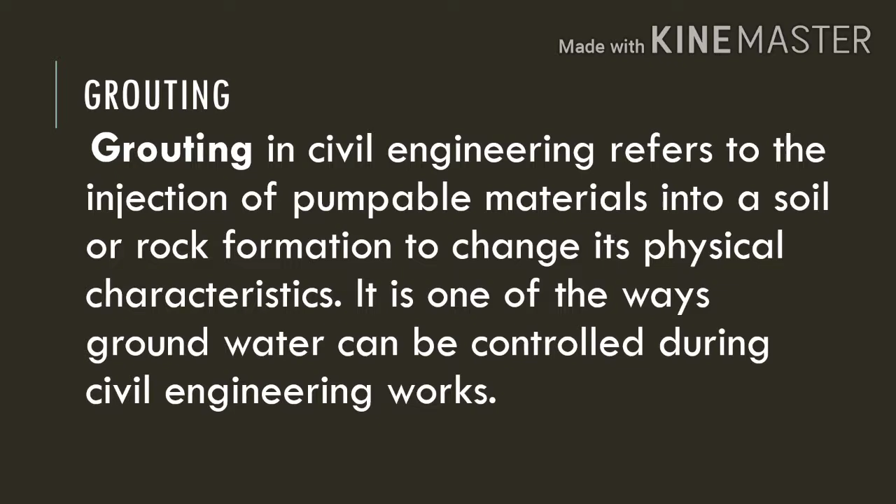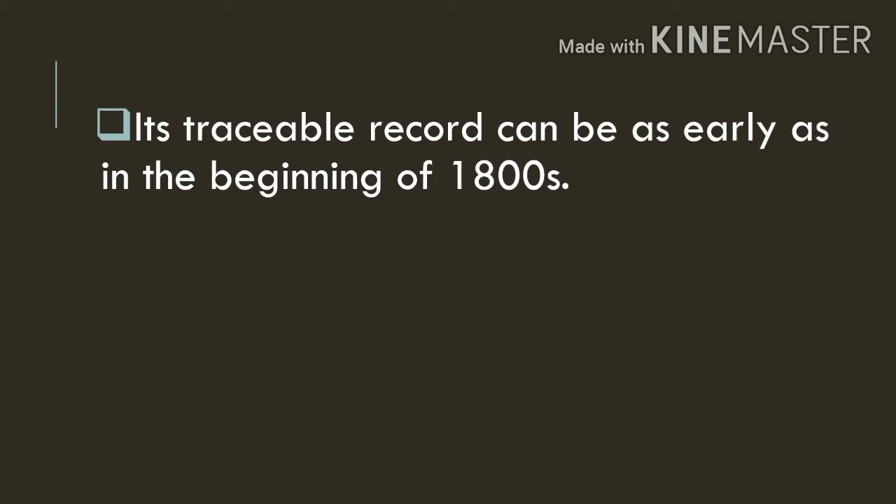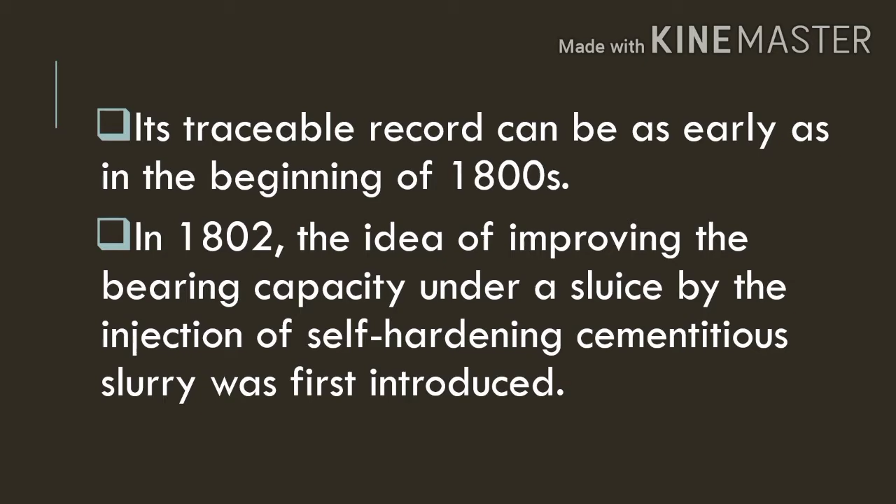History and development of grouting in civil engineering. Its traceable record can be as early as the beginning of the 1800s. In 1802, the idea of improving the bearing capacity under a sluice by injecting self-hardening cementitious slurry was first introduced. In 1864, Peter Barlow patented a cylindrical one-piece tunnel shield which could fill the annular void left by the tail of the shield with grout. This is the first recorded use of cementitious grout in underground construction.

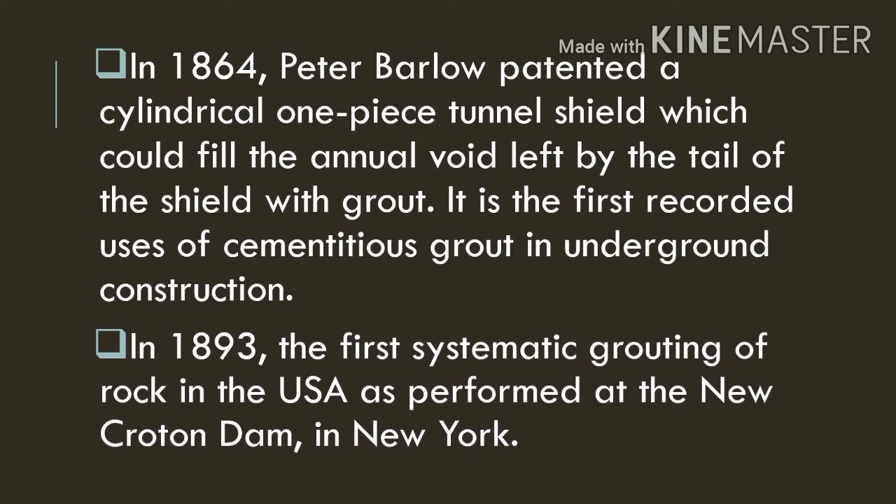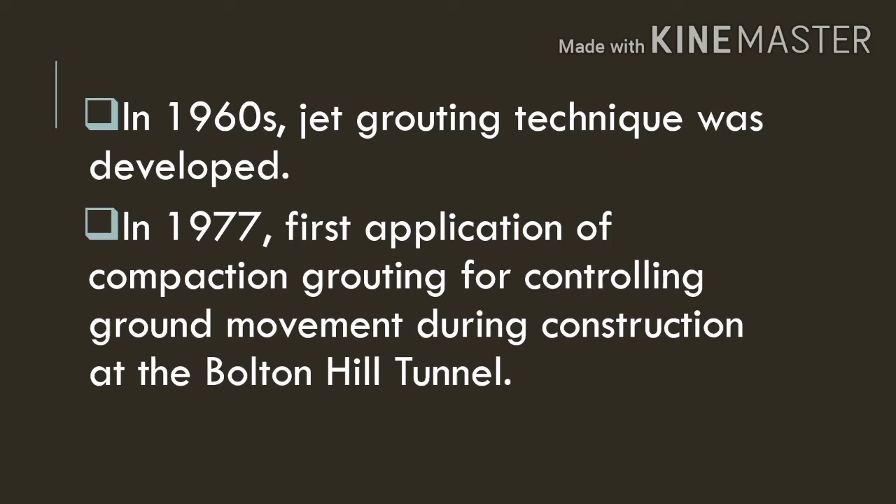In 1893, the first systematic grouting of rock in the USA was performed at the New Croton Dam in New York. Later, in the 1960s, jet grouting technique was developed. In 1977, at the Bolton Hill Tunnel, the first application of compaction grouting for controlling ground movement during construction was held. And in 1995, the first industrial application of the compensation grouting concept was conducted at the construction site of the Jubilee Line Extension project in London.

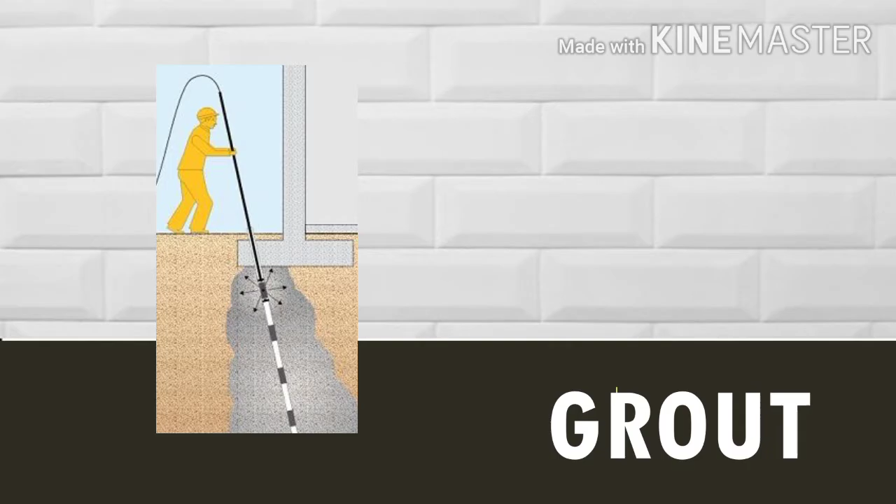Now let's move on to the definition of a grout. Grout is a composite material used in construction to fill voids and seal openings in surfaces. It can also be defined as a solution, an emulsion, or a suspension in water which will harden after a certain time interval. It can be divided into two main groups, namely suspension grout and liquid grout or solution grout.

Suspension grout is a mixture of one or several inert materials like cement and clays suspended in a fluid, water. According to its dry matter content, it is either of the stable or unstable type. It is a mixture of pure cement with water.

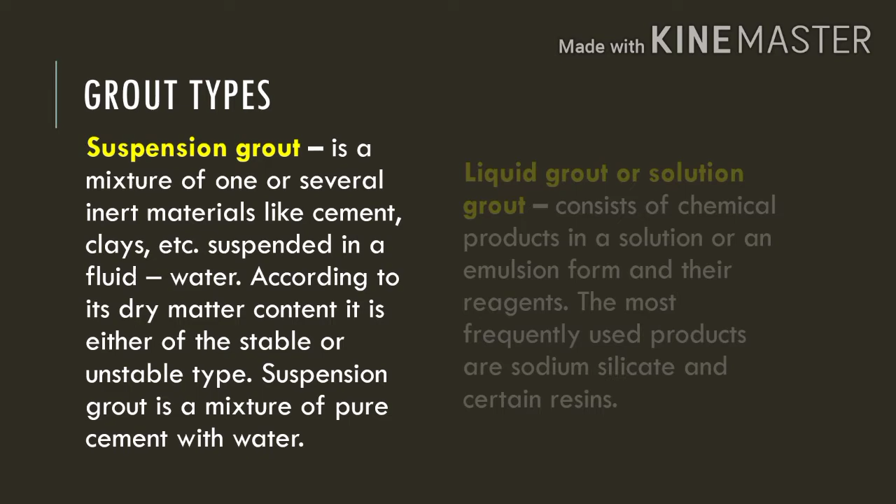On the other hand, liquid grout or solution grout consists of chemical products in a solution or emulsion form and their reagents. The most frequently used products in this liquid grout are sodium silicate and certain resins.

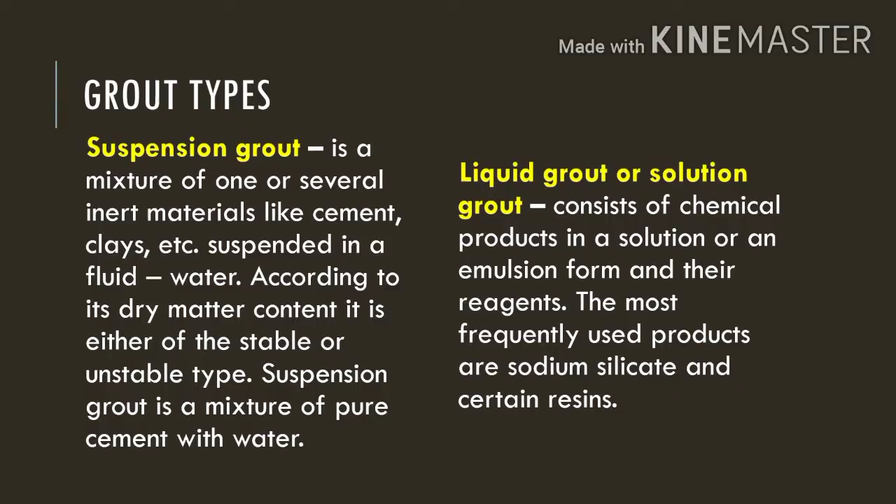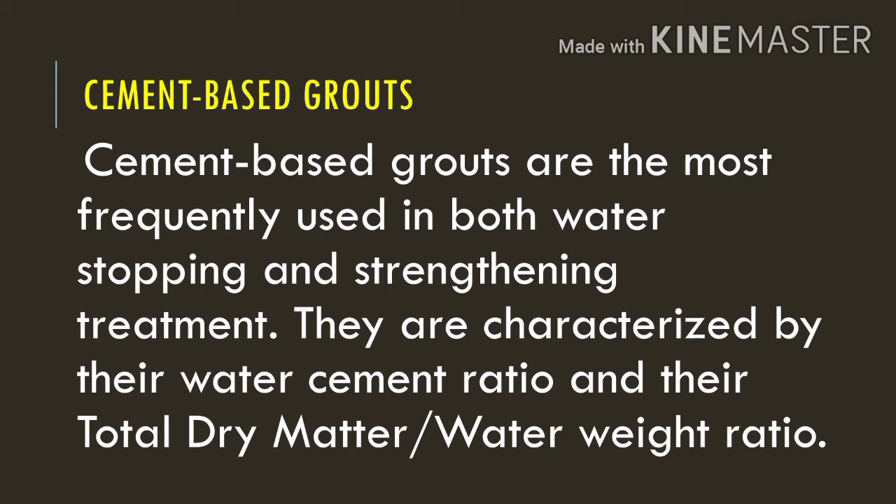There are several known materials which can be used in grouting. First, we have cement-based grouts. Cement-based grouts are the most frequently used in both water stopping and strengthening treatment. They are characterized by their water-cement ratio and their total dry matter/water weight ratio. The properties and characteristics of these grouts vary according to the mix proportions used.

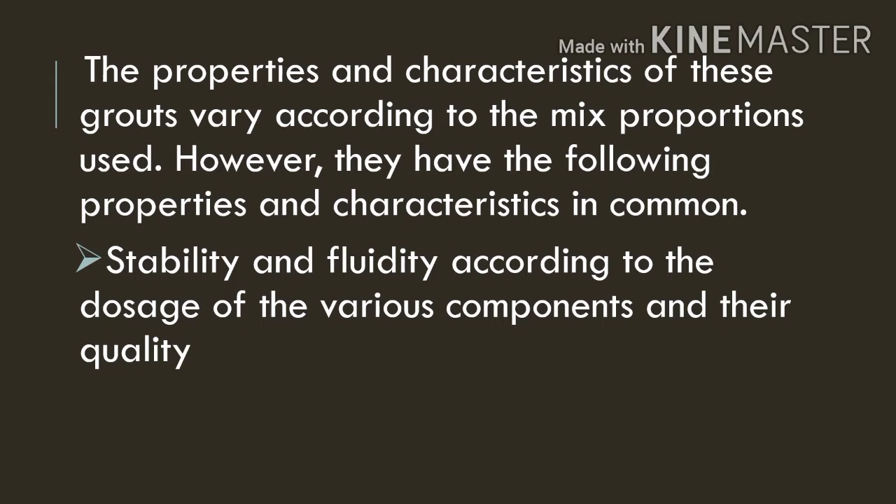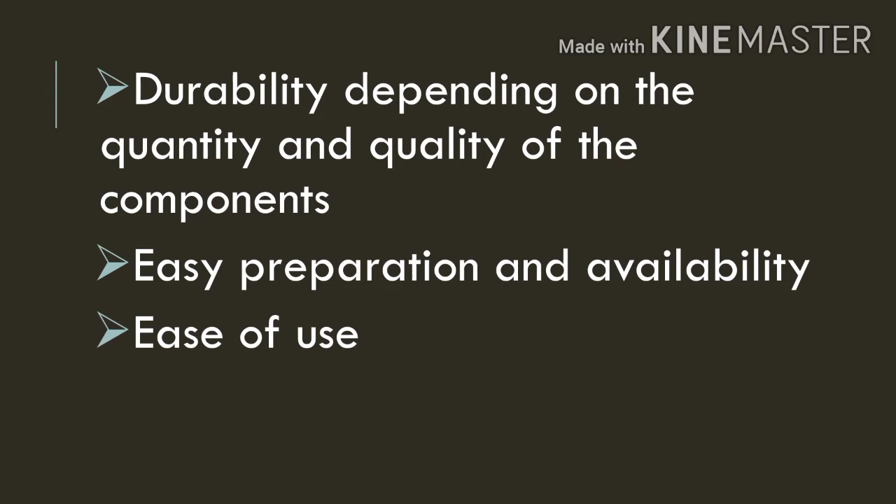However, they have the following properties and characteristics in common: stability and fluidity according to the dosage of the various components and their quality; unconfined compressive strength linked to water-cement ratio; durability depending on the quantity and quality of the components; easy preparation and availability; ease of use; and relatively low-cost mixes.

Another type of grouting material is the pure cement grout. Pure cement grout is an unstable grout. However, bleeding can be avoided with a water-cement ratio less than 0.6 to 0.7. Usual mix proportions are from water-cement ratio 0.4 to 1 for grouting. Very high mechanical strength can be attained with this type of grout.

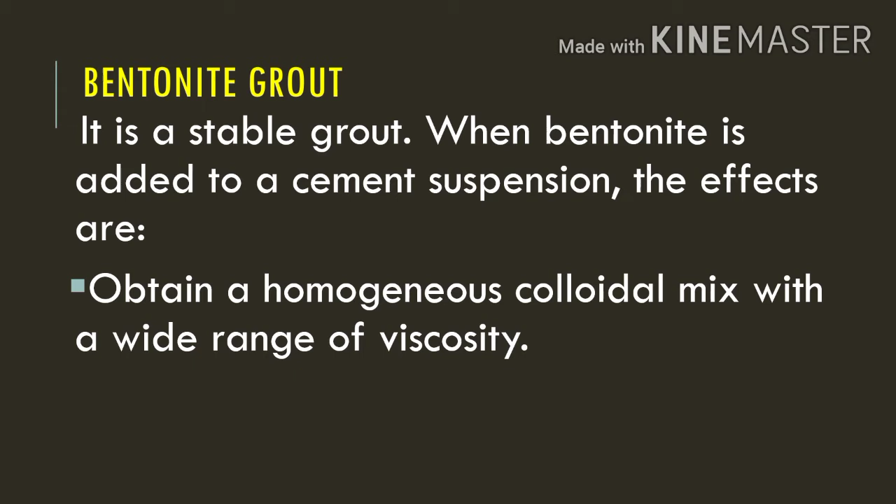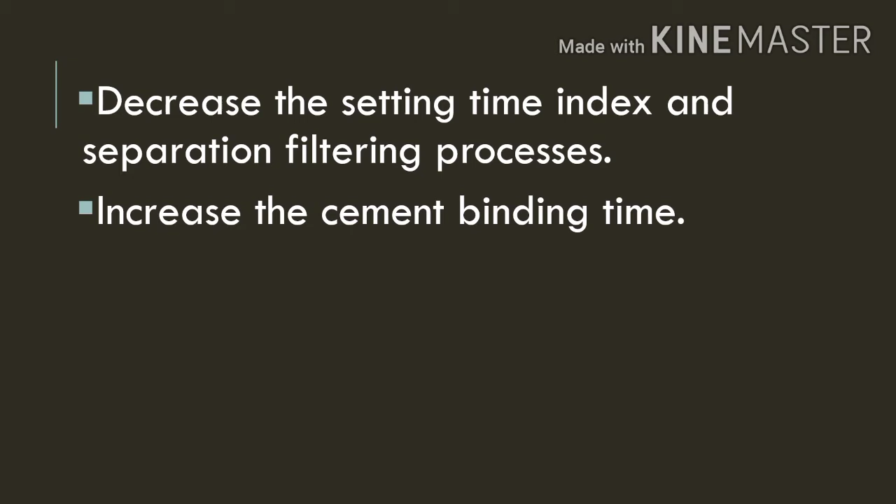Bentonite grout, on the other hand, is a stable grout. When bentonite is added to a cement suspension, the effects are: it may obtain a homogeneous colloidal mix with a wide range of viscosity, avoid cement sedimentation during grouting, decrease the setting time index and separation filtering processes, increase the cement binding time, improve the penetration in compact type soils, and obtain a wide range of mechanical strength values.

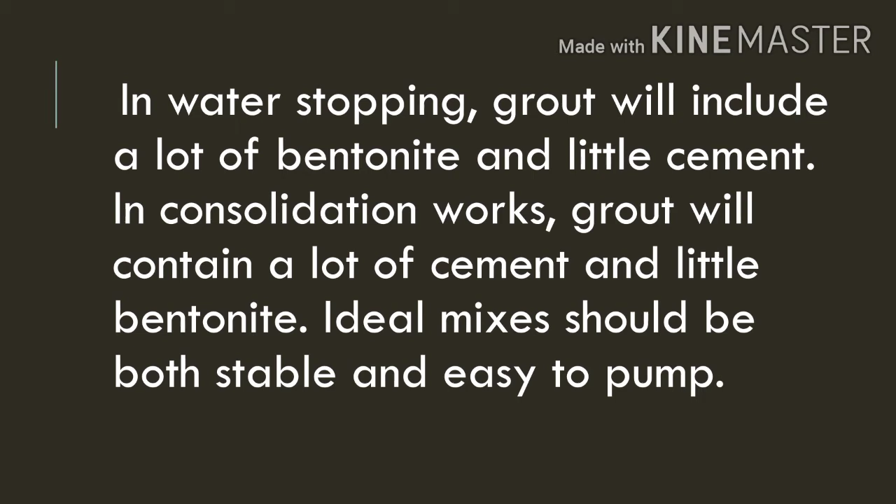In water stopping, grout will include a lot of bentonite and little cement. In consolidation works, grout will contain a lot of cement and little bentonite. Ideal mixes should be both stable and easy to pump.

Another type of material is grouts with fillers. Fillers are added in order to modify the viscosity of a given grout so as to obtain a low-cost product to substitute the cement. The most commonly used fillers are natural sands and fly ash from thermal power stations.

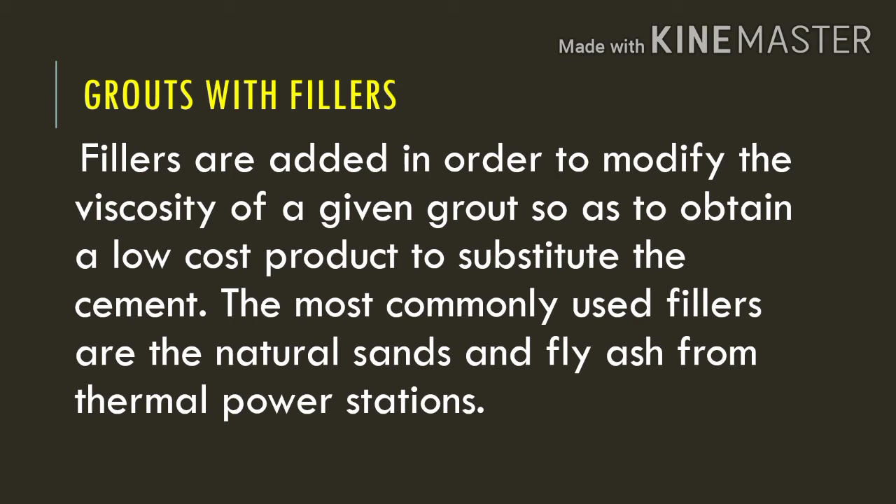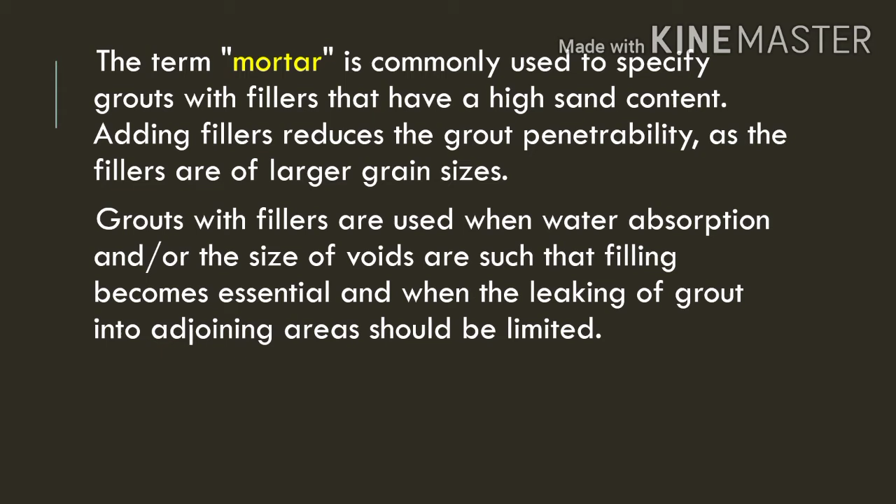Grouts with fillers are used when water absorption and/or the size of voids are such that filling becomes essential, and when leaking of grout into adjoining areas should be limited. In addition, fillers in grout will produce low slump grout with high viscosity for certain grouting purposes.

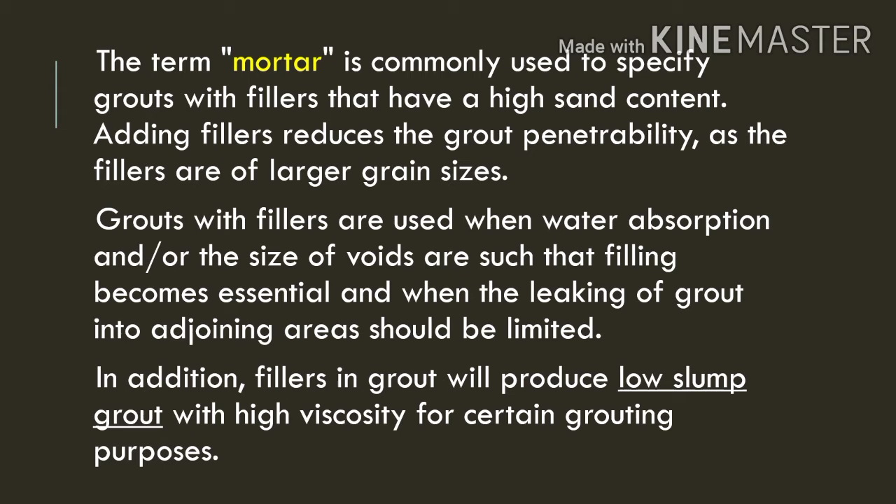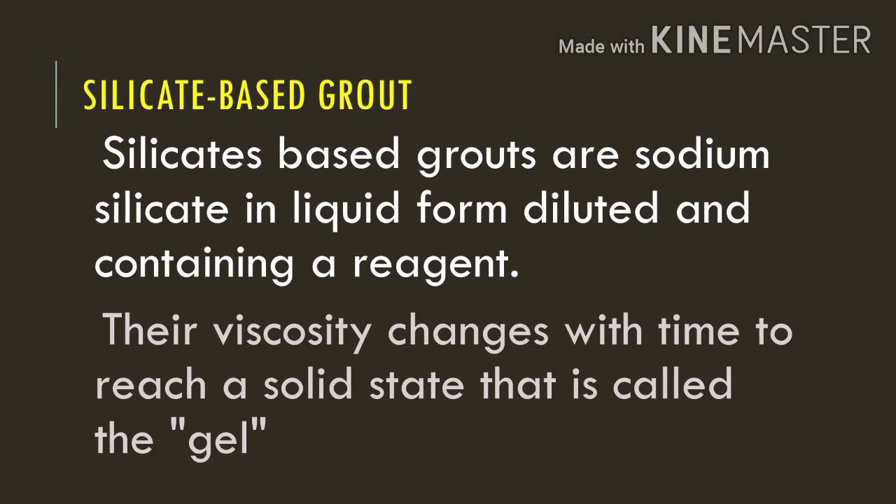Silicate-based grout. Silicate-based grouts are sodium silicate in liquid form, diluted, containing a reagent. Their viscosity changes with time to reach a solid state called the gel. They are used in soils with low permeability values such that suspension grouts cannot penetrate.

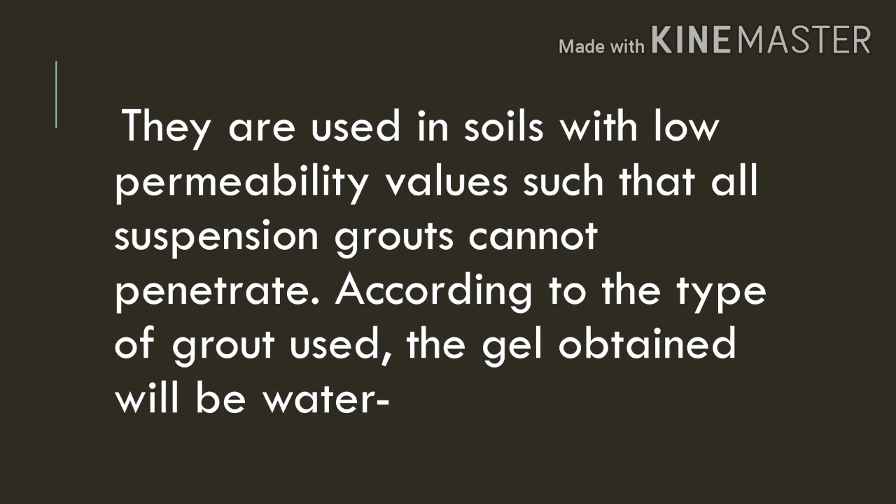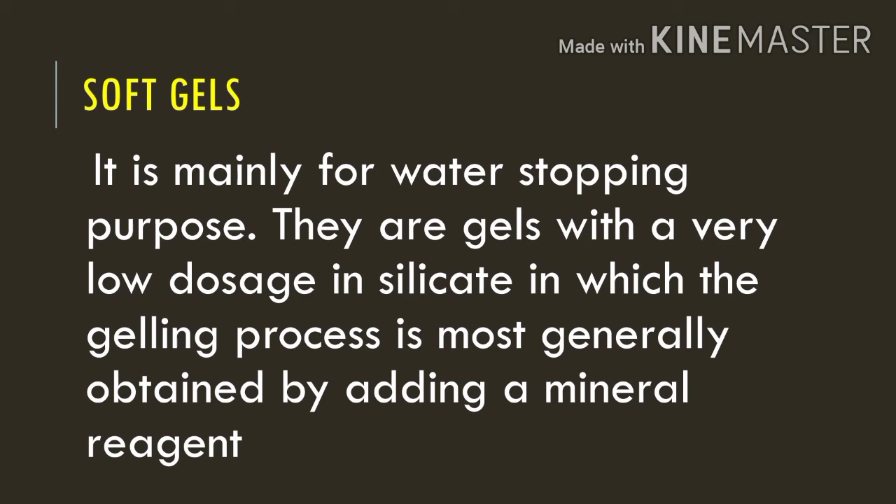Soft gels are mainly for water stopping purposes. They are gels with a very low dosage of silicate, in which the gelling process is most generally obtained by adding a mineral reagent. Now let's discuss the desirable characteristics of grout.

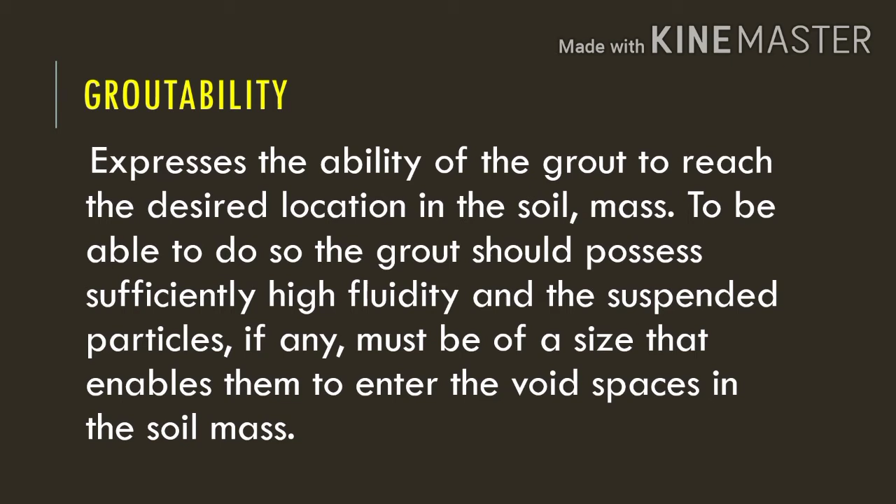Groutability expresses the ability of the grout to reach the desired location of the soil or the mass. To be able to do so, the grout should possess sufficiently high fluidity, and the suspended particles, if any, must be of a size that enables them to enter the void spaces in the soil mass.

Stability is the capacity of the grout to remain in a fluid state and not segregate into its separate components. We need the grout to be stable until it has reached its destination. Stability of clay cement grout is usually more than that of a cement grout.

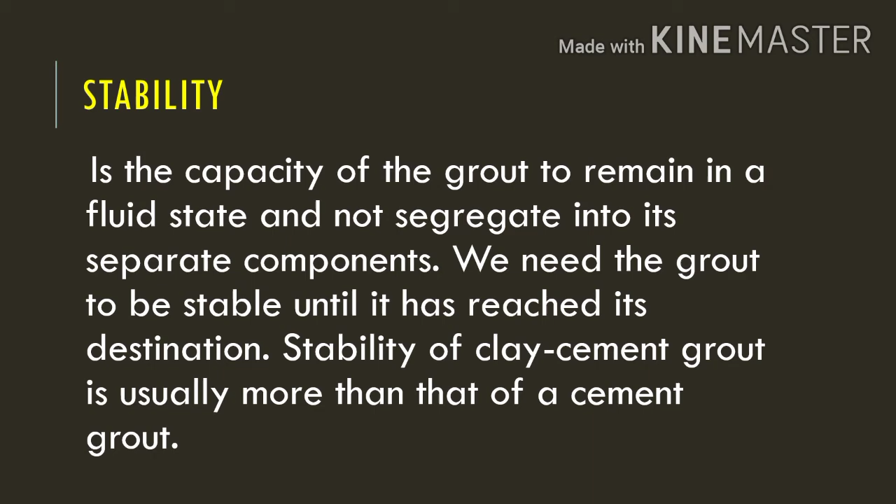Third is the setting time. It is the time it takes before the grout sets into a cemented mass or gel. Early setting can cause difficulty in grout reaching its destination, and late setting can result in the grout being washed away if seepage is occurring through the soil. Additives are used to retard or accelerate the setting time as required.

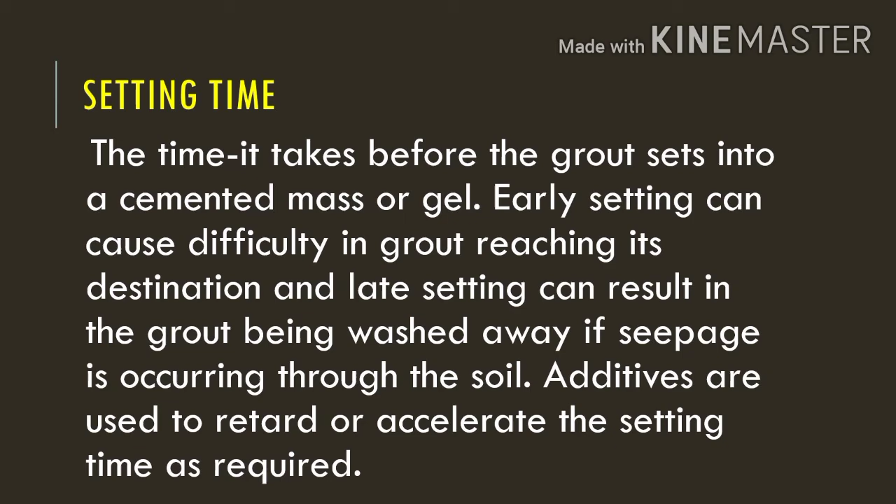Fourth, permanence. It indicates the resistance the grout possesses against being displaced from the soil voids with time. Cement grouts have greater permanence than bentonite grouts, which can get washed away with time by seepage of water through the grouted zone.

Toxicity is the capacity of the grout to contaminate the groundwater coming in contact with it, and of adversely affecting the health of workers handling and injecting the grout into the soil.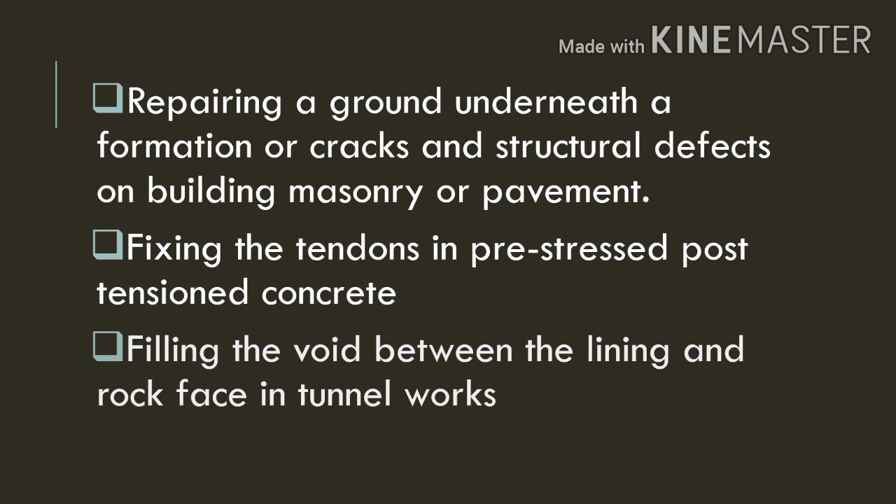It can also be used in fixing the tendons in pre-stressed post-tension concrete, and filling the void between the lining and rock face in tunnel works.

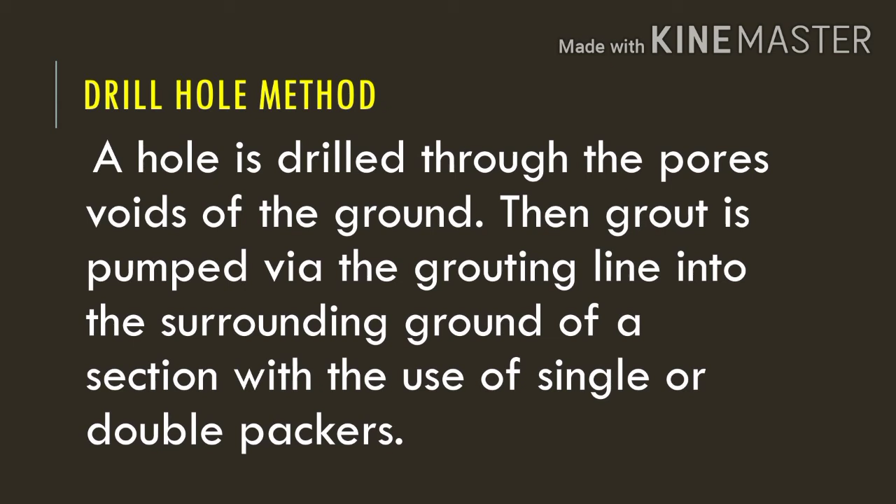In this video, we are going to mention 4 methods. In the drill hole method, a hole is drilled through the pores voids of the ground. Then grout is pumped via the grouting line into the surrounding ground of the section with the use of a single or double packers.

Drill tool method is a one-stage grouting method by means of the drill casing or rod. In the grout pipe method, grout pipes are installed in the drilled hole for later grouting injection operation. The gaps between the grout pipe and the drilled hole are normally sealed. Compared with the drill tool method, it is more flexible as the drilling plant is not engaged in the grouting operation.

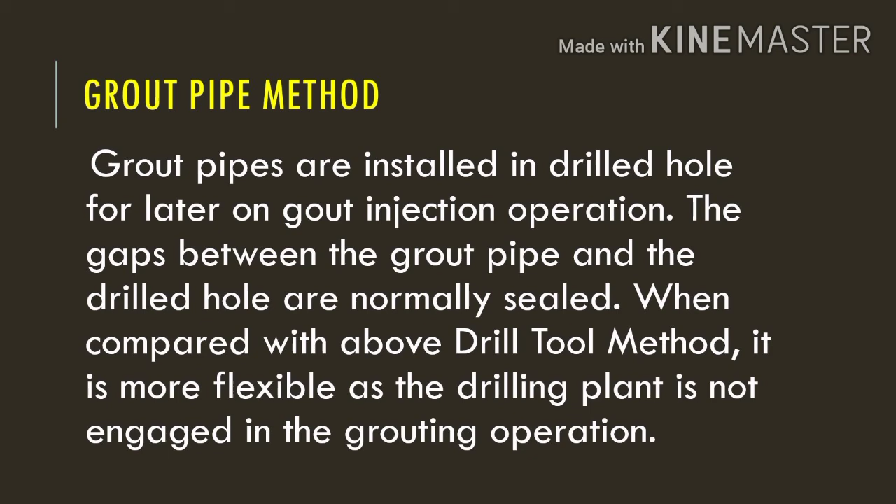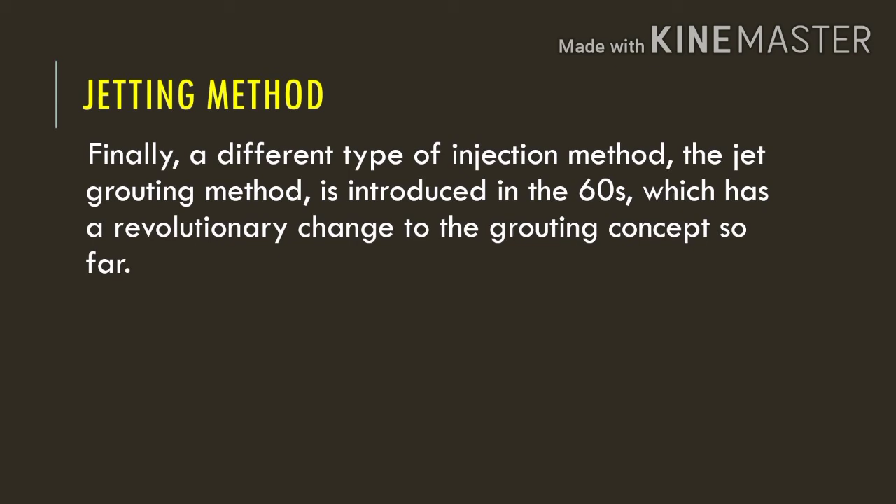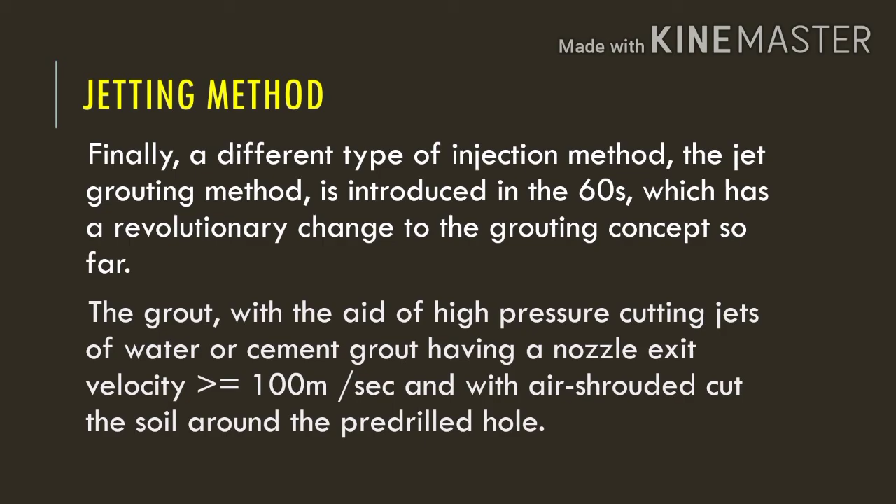Finally, a different type of injection method, the jet grouting method or jetting method, was introduced in the 60s, which was a revolutionary change for the grouting concept so far. It injects grout with the aid of high-pressure cutting jets of water or cement grouting having a nozzle exit velocity of more than 100 meters per second, and with air-shrouded cut the soil around the drilled hole.

Let's proceed to the different types of grouting mechanisms. First is rock fissure grouting. Rock fissure grouting is the use of a hole drilled through the fissures and joints of a rock mass to allow grout to be injected at close centers vertically, and re-injecting if necessary.

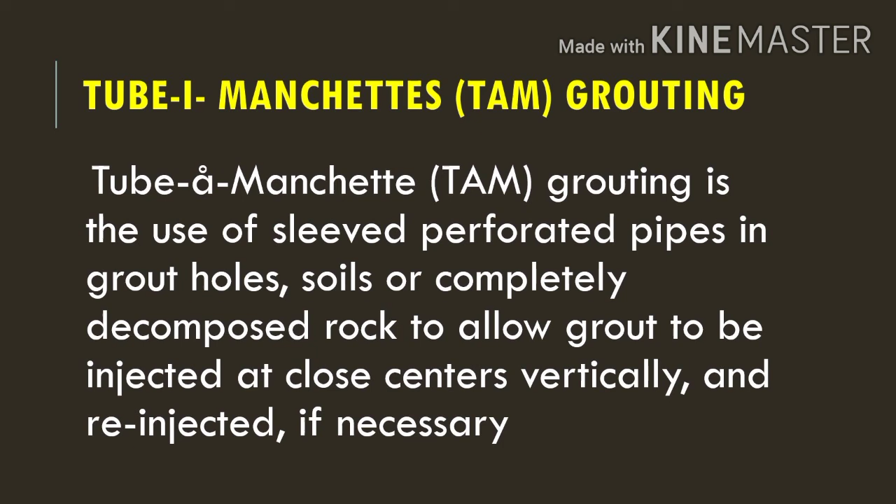Tube-à-Manchettes, or TAM grouting, is the use of sleeved perforated pipes in grout holes, soils, or completely decomposed rock to allow grout to be injected at close centers vertically, and re-injected if necessary.

Compaction grouting is a single-stage grouting with high-strength mortar into the ground to create a grout bulb at the end of a drill pipe.

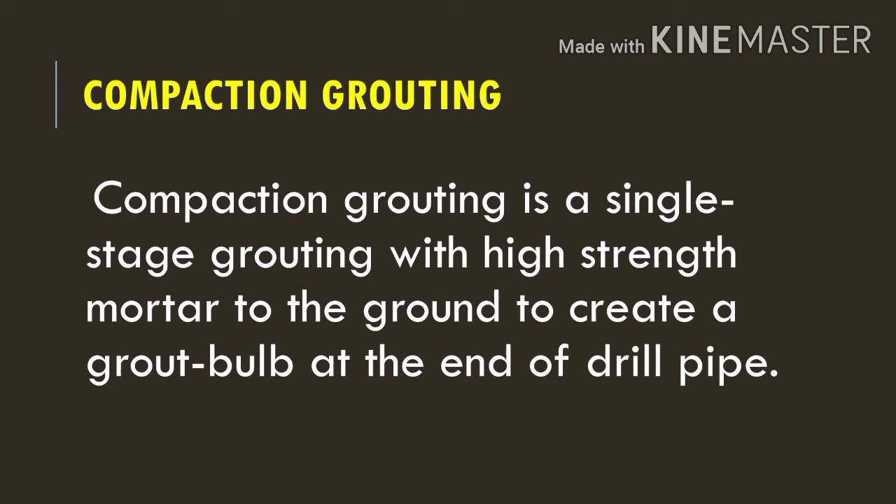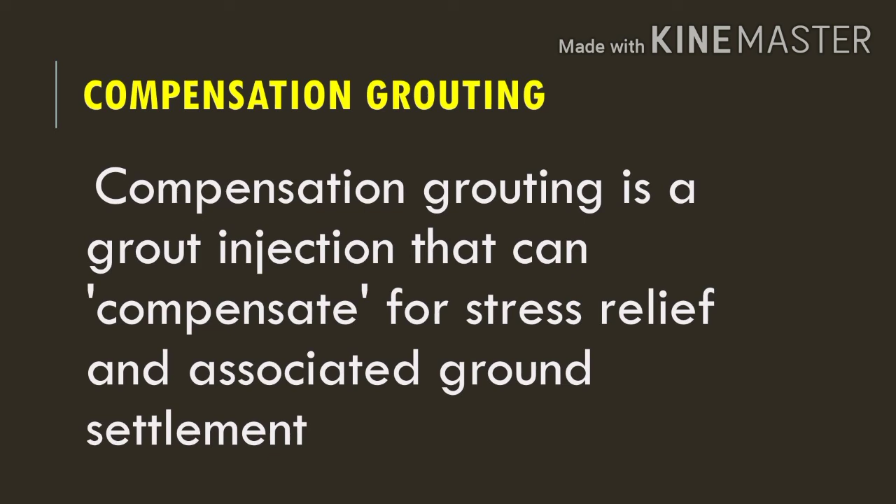Compensation grouting is a grout injection that can compensate for stress relief and associated ground settlement. Jet grouting is a grout injection that cuts and mixes the soil to be treated with cement or cementitious grout.